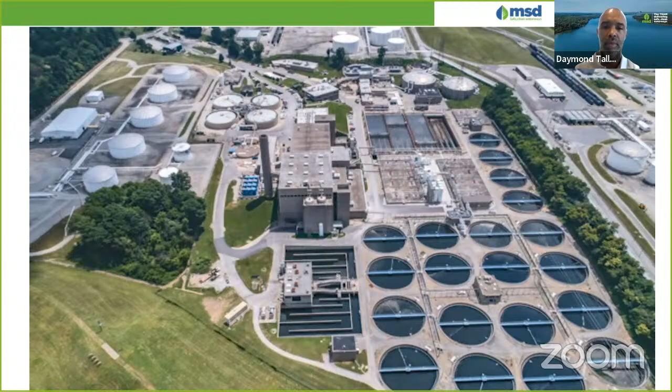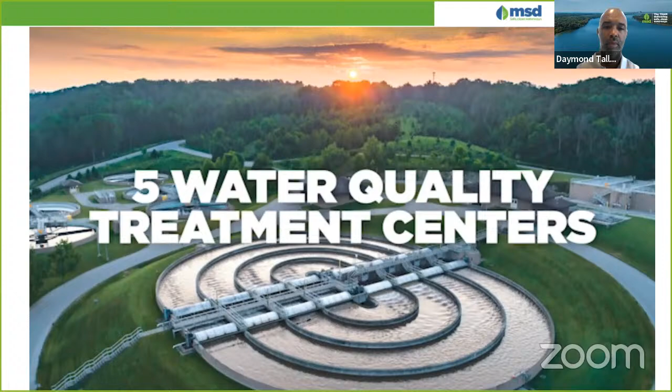First up, wastewater treatment. This is the water we send down the drain from sinks, showers, tubs, and toilets. MSD treats more than 170 million gallons of wastewater every day. 5 water quality treatment centers ensure that the water meets or exceeds regulatory standards before it's released back into local streams and the Ohio River.

Next up, stormwater management. What happens when we get heavy rains or after it snows? All of that water has to go somewhere. MSD makes sure the runoff flows into drainage channels to underground pipes that transport water away from homes and businesses and into area creeks, streams, and the Ohio River.

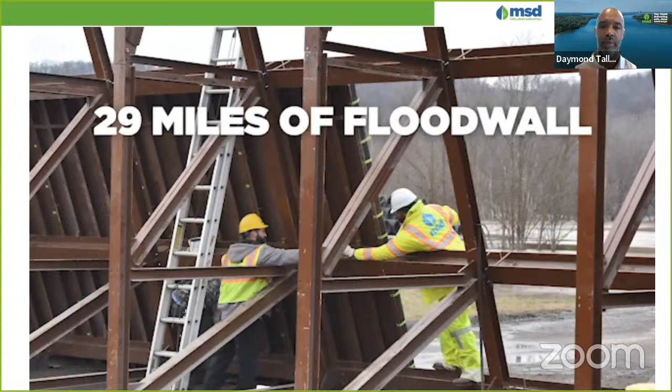Now let's talk about flood protection. MSD flood protection infrastructure includes 29 miles of flood wall, 16 pumping stations, 150 floodgates, and 80 flood wall closures. It all works together, keeping the community safe when river waters rise.

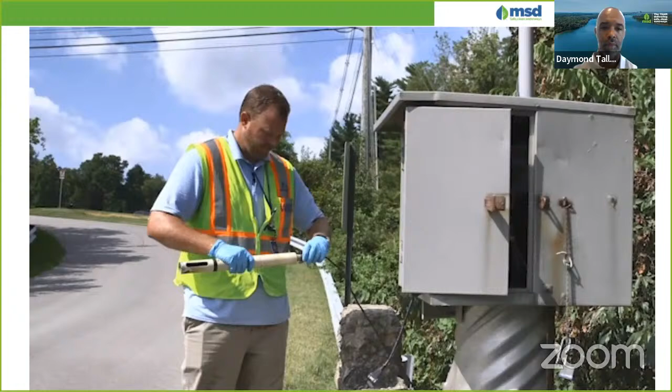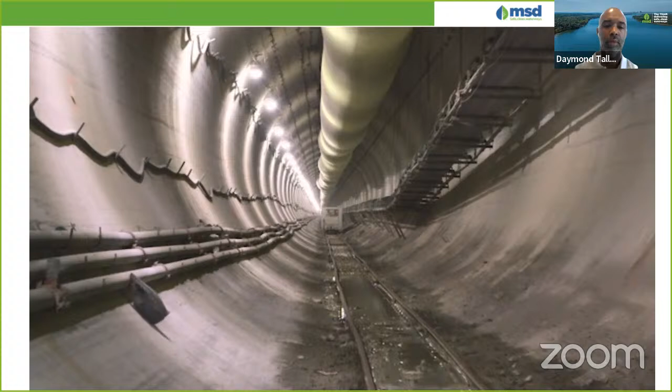MSD also closely monitors water quality within the system to make sure pollutants don't contaminate our waterways. Plus, the innovative technology and engineering of MSD's waterway protection tunnel and underground storage basins further protect our community from dangerous overflows and pollution. There's more to MSD than you imagined, right?

MSD is dedicated to our community's health, a cleaner environment, and a better quality of life for all area residents, today, tomorrow, and for years to come.

Again, welcome to our 3rd virtual meeting. I believe one day soon we will be able to get back to face-to-face meetings, but for now, virtual meetings seem to be the norm.

Even though we are not face-to-face, we have worked hard to make sure you have opportunities to participate in this meeting. Anytime during the meeting, if you have a question, you can ask it by emailing it to odor@louisvillemsd.org. You can also enter in your question via the chat option on your YouTube feed. We have a team of folks that are actively monitoring these feeds, and we will try to provide an answer to your question before the meeting ends.

So when we finish with today's meeting, I would like for you to take away 3 outcomes. I want to introduce the Clarity program and our plan for mitigating these naturally occurring odors. I want to give you a brief background on how odors are generated, and then describe what you can do if you smell an odor.

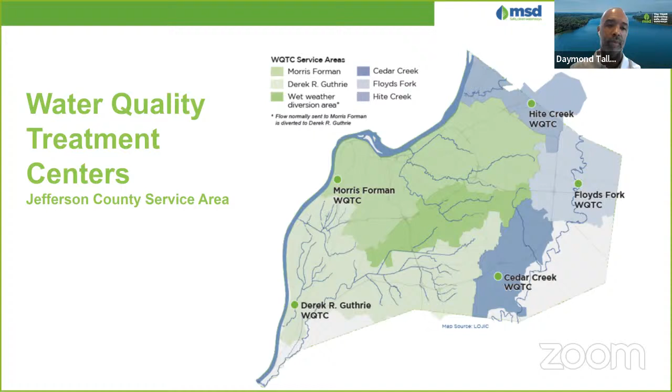A natural phenomenon within any wastewater collection system is the production of odorous gases. MSD proactively addresses and manages sewer odors caused by changes in naturally occurring weather patterns, causing extended periods of dry weather. Compounding lower velocities in the collection system has increased odor levels and odor complaints.

Today, we want to introduce our new odor initiative, Smell Something, Say Something. MSD has dedicated staff to help address the odors you are smelling.

I'd like to take a moment to introduce the staff members on the odor team. Again, I am Daymond Talley, Operations Director of Treatment Facilities, Wes Sidnor, Chief of Government and Public Affairs, Cheryl Lauder, Communications Director, and Robin Burch, Odor Control and Biosolids Program Manager. I will now turn it over to Robin.

Thanks, Daymond. I want to tell you a little bit more about our job at MSD as it relates to odors. Today, we spend over $1 million of our operations budget mitigating odors.

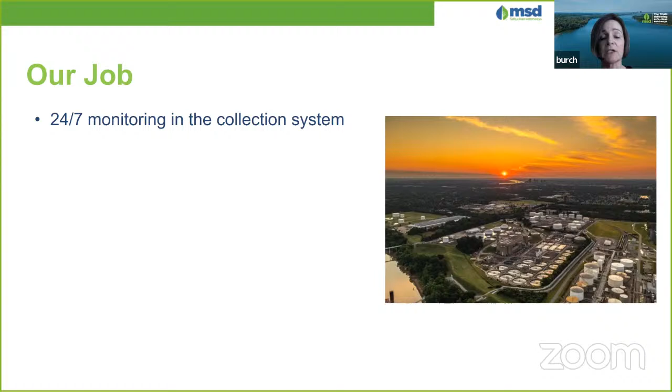We monitor the wastewater collection system for odors all the time. We have a full-service odor control contract with a local company that performs real-time monitoring of key locations in our wastewater collection system. They can adjust chemical additions in real time at pump station locations if they detect higher than normal monitoring results.

This past year, we just finished an oxygen injection project at one of our major force mains. Initial monitoring results shows a reduction of almost 100% in our gas monitoring. We have a fleet of dedicated staff for cleaning over 20,000 catch basins each year.

MSD's sewer system is old. Some of our wastewater collection system dates back to the Civil War. So unfortunately, we are constantly repairing and in some instances replacing the entire sewer. For those of you traveling downtown this past year, you know exactly what I'm talking about.

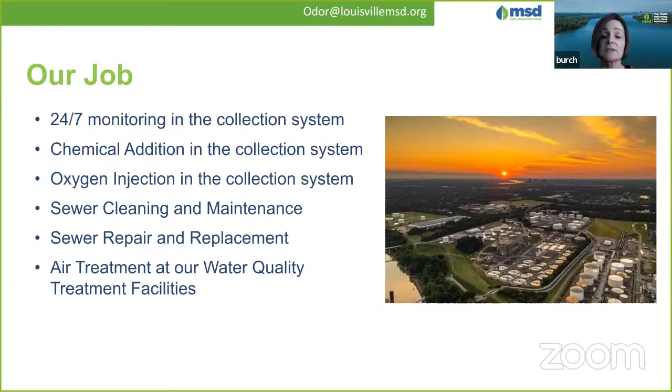And finally, we have air treatment equipment at our water quality treatment facilities. But with all of this, we still get odor complaints. So MSD is starting an initiative by completing a new odor control master plan to see what else we can do to help mitigate the naturally occurring odors.

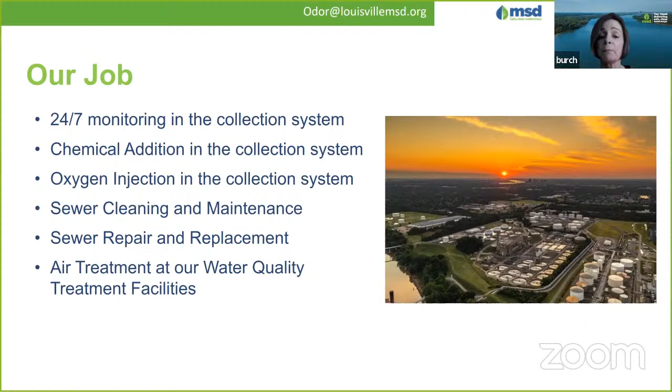MSD uses a variety of methods to help mitigate odors. For small air streams, carbon canisters are installed on manholes and pressure relief valves. These are mostly at our smaller pump stations. Using carbon is the simplest form of odor treatment. The carbon attracts and holds onto the odor-causing compounds as the airstream passes through the canister.

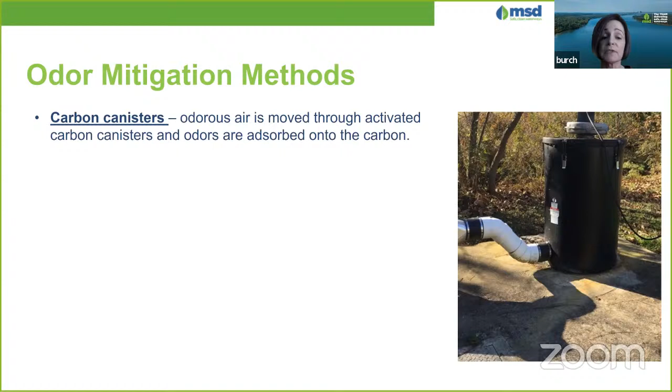At some of our larger pump stations in the wastewater collection system, we use chemicals to prevent hydrogen sulfide formation. Bioxide is a non-hazardous chemical that is commonly added to wastewater streams for odor mitigation. As we mentioned before, hydrogen sulfide occurs naturally in the waste stream. This chemical addition creates an environment that allows bacteria to actively consume the dissolved sulfides that are present in the waste stream before they are converted to hydrogen sulfide.

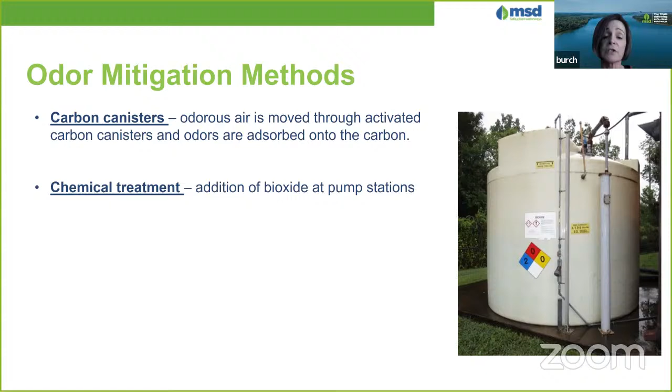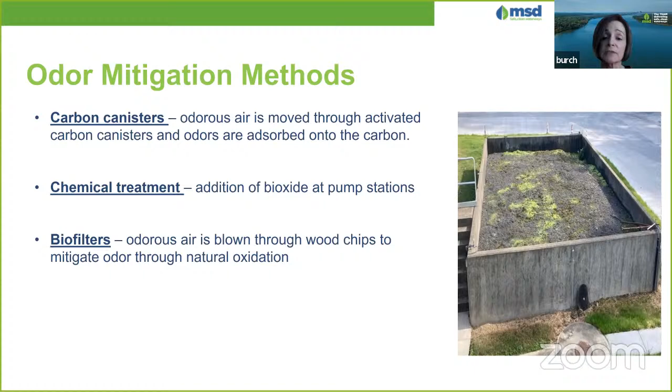We have a few biofilters at our treatment facilities that are a very simple treatment process by exhausting the air through wood chips or large pieces of mulch. Again, bacteria live on the wood chips or the mulch, and they consume the odorous compounds as the airstream passes through.

And finally, we use biological scrubbers to help reduce the odor. Biological scrubbers are more complicated to operate. There are a lot more moving parts than biofilters, but the premise is still the same. Inside the vessels is a bed of filter material, and living on the material is our bacteria friend that consumes the odorous compounds as the airstream passes through.

One advantage of biological scrubbers over biofilters is you can work with the manufacturer to change the type of filter you have installed to help remove more than just hydrogen sulfide from the airstream. For example, we can also remove mercaptans. So that's a little background on MSD and what we do to help reduce the odors. Now, Daymond is going to talk through the collection system.

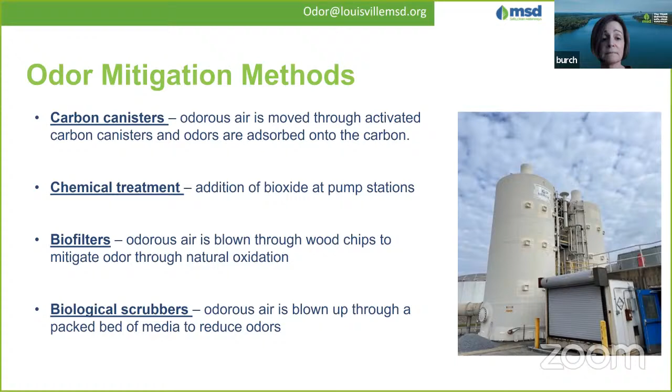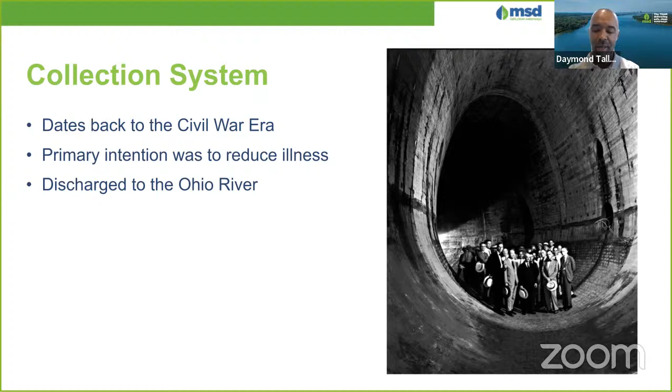The main purpose for the wastewater collection system was to remove the waste from the population city to reduce illness. At that time, the raw sewage went directly into the Ohio River and Beargrass Creek.

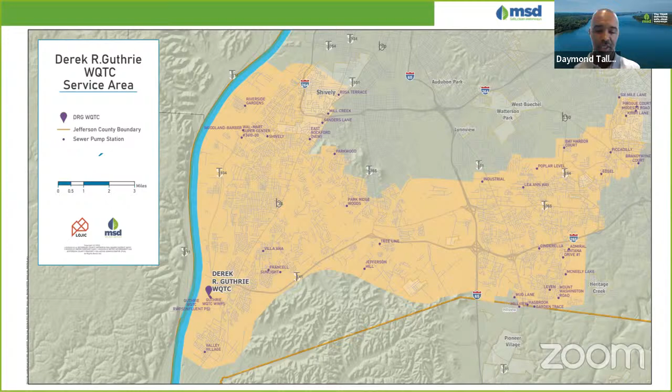So as I mentioned on the previous slide, in a combined sewer, all of the street drains and catch basins are connected to the sewer line in the street. So when it rains, all of the rainwater is transported via the collection system to the treatment plant. So during these wet weather events, the treatment plant can get significantly more flow.

While we don't have this combined system here at the Derek Guthrie service area, we do want to explain why this system experiences some odors, in case you happen to be downtown and other parts of the community in the combined system. Part of the challenge in some older parts of the community is that the combined system, the catch basins, are tied directly to the sewer pipe, carrying the wastewater to the treatment plant. So in this case, the Morris Forman Water Quality Treatment Center in West Louisville.

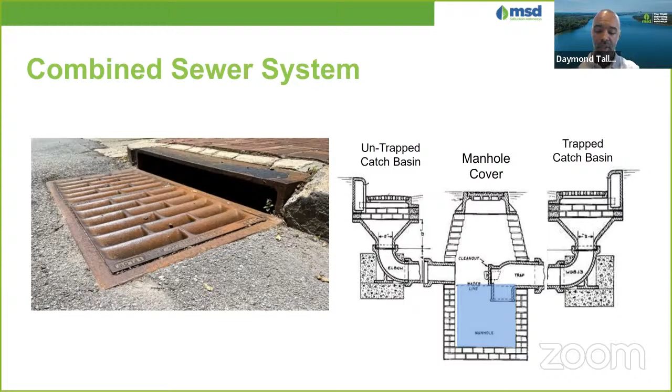And our investigations have determined that there are still a number of locations in the combined system where some of the original catch basins, when they were installed decades ago, were installed without traps. So a trap catch basin works just like the trap underneath your bathroom or kitchen sinks. As long as the trap contains water, the odor from the pipe or the sewer will not back up through the catch basin and out into the atmosphere.

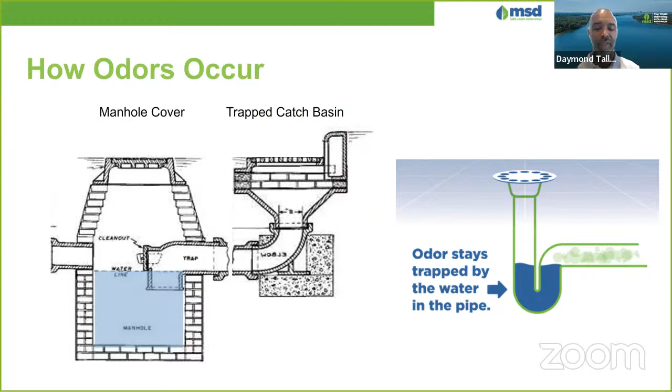In a catch basin that is trapped, any odor cannot escape past the water level. As you can see from the diagram, the trap is below the water line.

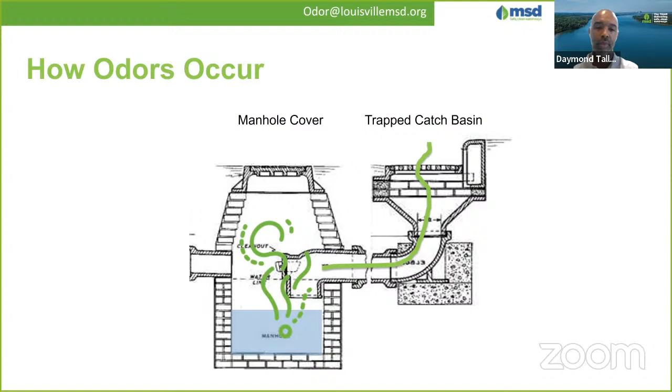However, just like the trap in the sink that is not used very often, the water may dry out. This will cause odor in the pipe to travel out of the trap and into the atmosphere. This is what can occur during extended dry periods and during the hot summer months.

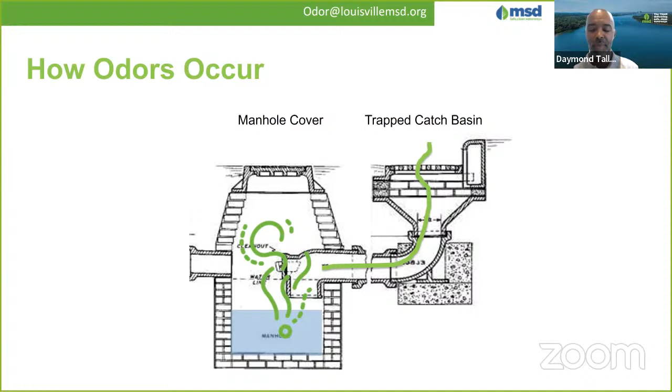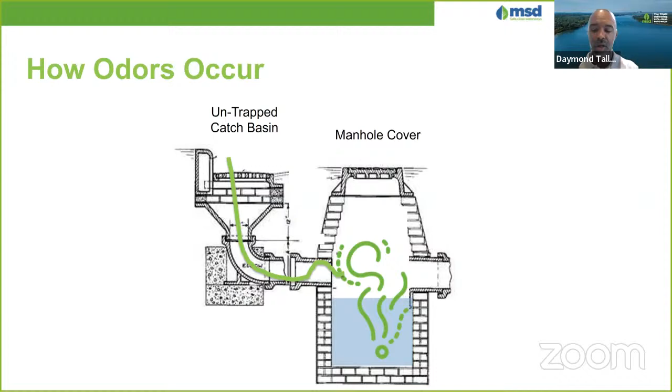So in an untrapped catch basin, there is not a water trap, so unfortunately any sewer odors can travel to the atmosphere. Untrapped catch basins are a major source of collection system odors in the combined system.

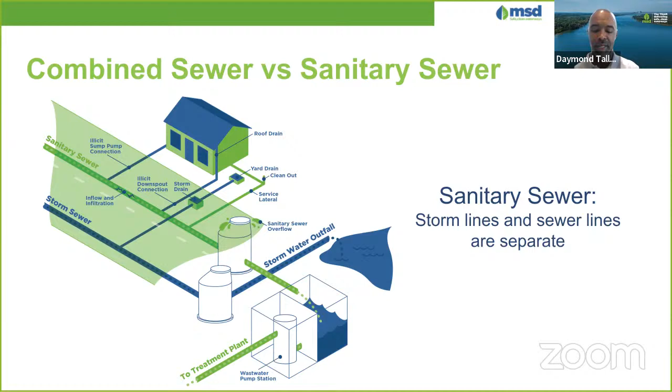As we've mentioned, here at the Derek Guthrie service area, you have a sanitary sewer, or sometimes we call it the separate sewer system. Here, the lines that collect the rain runoff from the streets are separated from the sewer lines that go to the Water Quality Treatment Center. The good news with the sanitary system is that we don't see a lot of the same odor issues because wastewater and stormwater are kept separate. In a separate system, there's not the issue of trapped versus untrapped catch basins. Since only rainwater is transported via the pipes connected to the catch basin, there's no sewer gas buildup.

But that doesn't mean that these are completely and always odor-free. When catch basins are blocked by materials that shouldn't be there, odor can result. You can help by keeping catch basins in your area free of debris.

For catch basins in the combined system, MSD would normally flush the basins with water to help mitigate the odor. For catch basins in the separate system, we can't flush with water because these catch basins drain to the stream, and by flushing with fresh water we'll be adding chlorinated water to the stream, which is against clean water regulations. This could harm stream aquatic life.

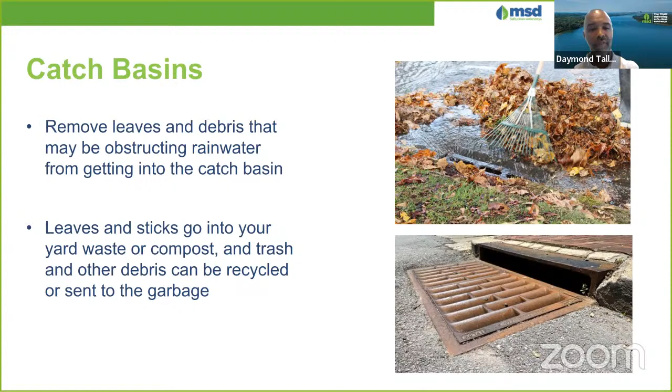Also in this part of the community, we utilize what is called a force main. The easiest way for wastewater to move is by gravity, but when you have an area that has hilly terrain, this might not be possible. MSD has installed force mains, which is a sealed pipe through which wastewater is pumped in order to move wastewater to the gravity part of the sewer system. Depending on the size and length of the force main, we have to install air relief valves to relieve any pressure that may have built up.

The Derek Guthrie collection system does have air relief valves, and they are typically located inside the smaller manholes. So if you happen to detect any odors around a manhole, this could be an issue.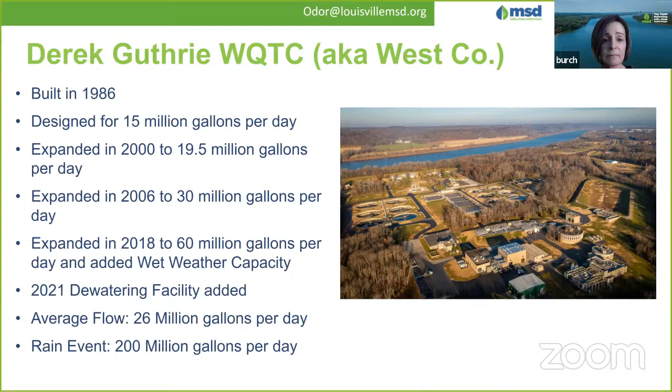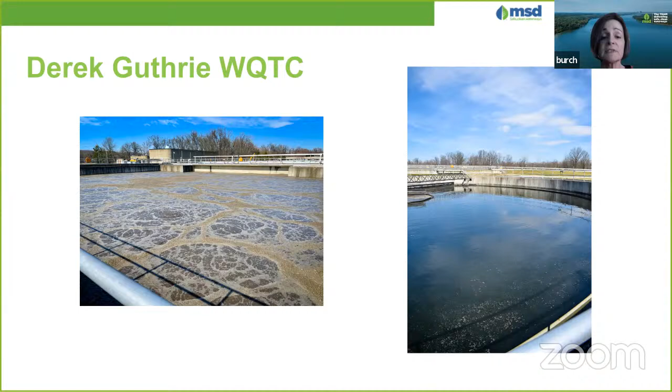This was MSD's first treatment facility to have wet weather storage and treatment. Derek Guthrie Treatment Facility is a contact stabilization treatment facility. What this means is once the solids are separated from the liquid stream, we aerate the solids with oxygen to allow the naturally occurring bacteria to begin the process of removing the organic material before discharging the clean water into the Ohio River.

In the 2018 plant expansion, a wet weather detention basin was constructed. You can see part of the wet weather basin in the right part of the screen of the aerial picture. This allows MSD to reduce sanitary sewer overflows, a requirement of our consent decree, by capturing up to 25 million gallons of storm flow that otherwise would not have received treatment during a rain event.

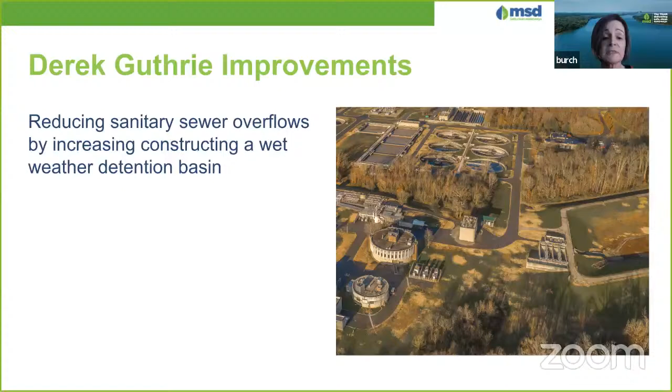The primary tanks at the Derek Guthrie Treatment Facility, the location where the raw wastewater starts the initial treatment process, are completely covered, and the odorous air is cleaned in carbon adsorber vessels before being exhausted to the atmosphere. During the 2018 expansion, we also added odor control carbon adsorbers on the wet weather pump station and the screening building.

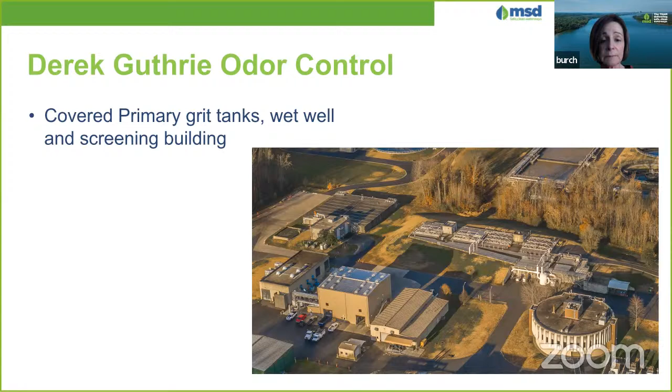Prior to 2021, all of the solids separated from the wastewater stream at the Derek Guthrie Treatment Center were pumped to Morris Forman Water Quality Treatment Plant. That was about 1.5 million gallons of solids a day.

Early in 2021, Morris Forman had a failure of their biosolids processing equipment. This forced MSD to procure a third party to set up a temporary solids handling at the Derek Guthrie facility while we designed and built a permanent facility.

In the early stages of the solids handling project, the process was located outside, and I'll admit it did have some odors associated with it. We built a second temporary phase of dewatering, the green building you see in the picture, which helped with the odor. And now there's a permanent building that is completed, just north of the green building you see in the picture. This permanent facility and the wash down pad for the biosolids containers have helped mitigate the odors during this past year.

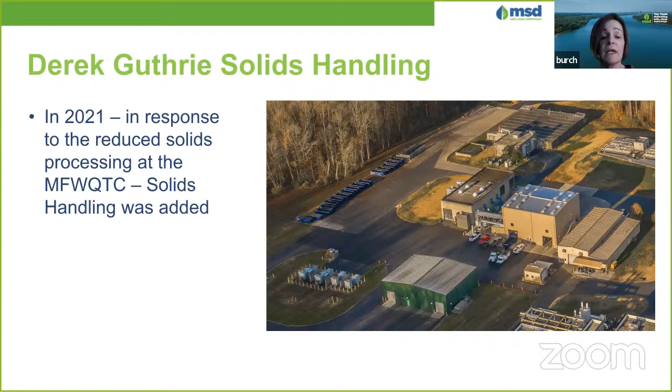MSD is very proud that the Derek Guthrie Treatment Facility is one of our 4 treatment centers to have earned an Operational Excellence Award from the Clean Water Professionals of Kentucky and Tennessee. It's quite a difficult designation to earn, as the U.S. EPA and Kentucky Division of Water issue all water quality treatment centers a permit with very stringent water quality treatment criteria to meet prior to discharging treated water into receiving streams. To qualify for this award, the facility can have no more than 1 permit exceedance in any given year. 3 other MSD facilities earned this designation as well: Cedar Creek, Hite Creek, and Floyds Fork treatment facilities.

The odors we're talking about are naturally occurring when sewage or other materials decompose. It's a natural part of the wastewater treatment process, and it's inevitable in our business. But as we've talked about, MSD goes to great lengths to minimize these odors as much as possible. And while we can't completely eliminate them, we can help manage them with your partnership.

The mission of Louisville MSD is ensuring safe, clean waterways through innovative sewer and wastewater treatment. But our work doesn't stop there. The MSD Clarity Program is our initiative to reduce odors that naturally occur when sewage and other materials break down. While we can't stop all of these odors, we can better manage them with your help.

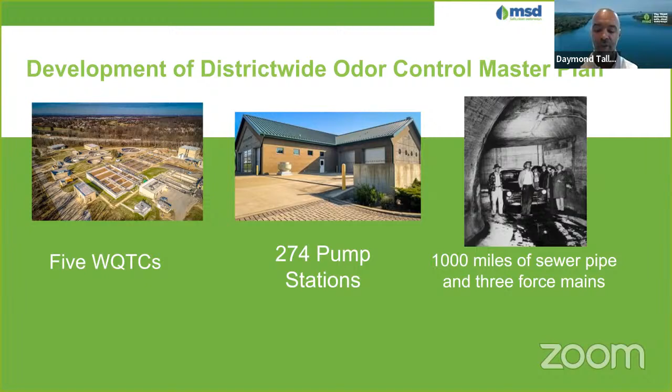This process began in the fall of 2019. MSD received a notice of violation for odors in the collection system, specifically odors in the Park DuValle and surrounding areas in West Louisville. This is the first notice of violation for the collection system MSD has ever received. We asked why this could happen, and the answer is the weather, with remarkably dry weather that summer. But we took that as the starting point of the development of our master plan.

Phase 1 has been focusing on Morris Forman, as the surrounding areas in the combined sewer system have been seeing a number of odor issues. Now, as we head into this year, phase 2 and beyond will branch out to the remainder of the treatment centers and their collection systems, including the Derek Guthrie service area.

A key component of our master plan is communication with you as our customer. We want our customers to better understand odors, how it's caused, and how to report it when you notice something. We have developed easier tools for you to be able to report an odor. We have updated our website and our literature to help educate you on the sources of odor and what you can do to help mitigate odors.